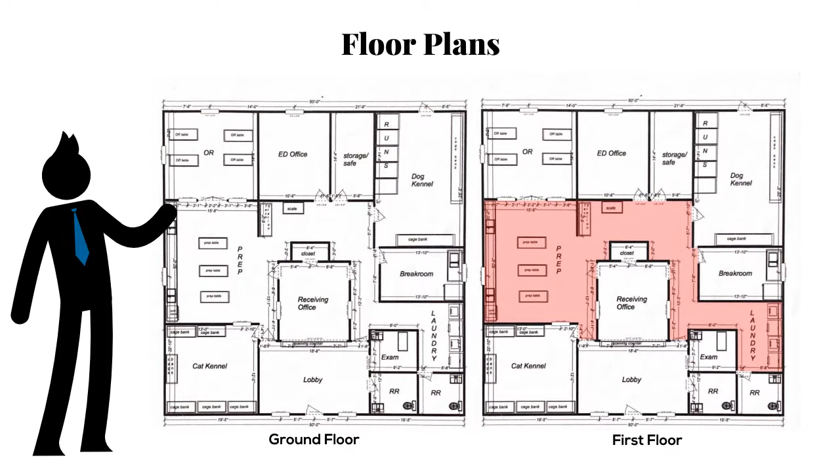Looking at the floor plans, to your left you can see the ground floor, which is similar to the first floor, except that in the first floor we have an opening looking down to the ground floor. I chose two areas for study.

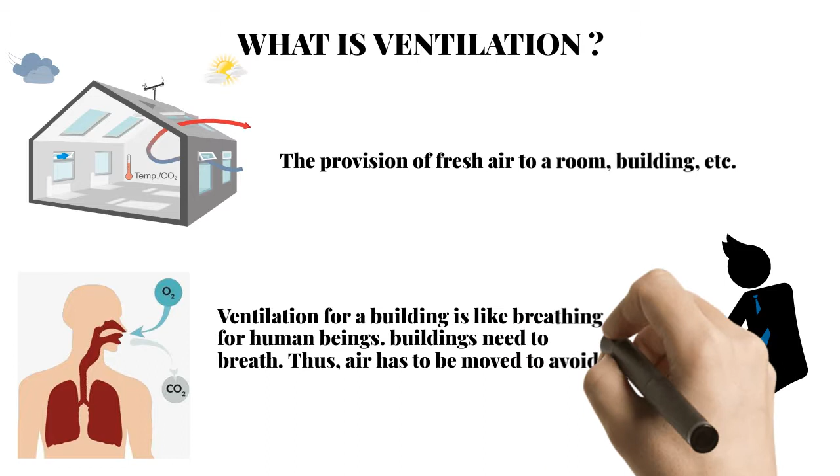But before that, we need to understand what is ventilation. Ventilation in the dictionary means the provision of fresh air to a room, building, etc. But when we're talking about a building, it's just like a human being. It needs to breathe to have a healthy environment.

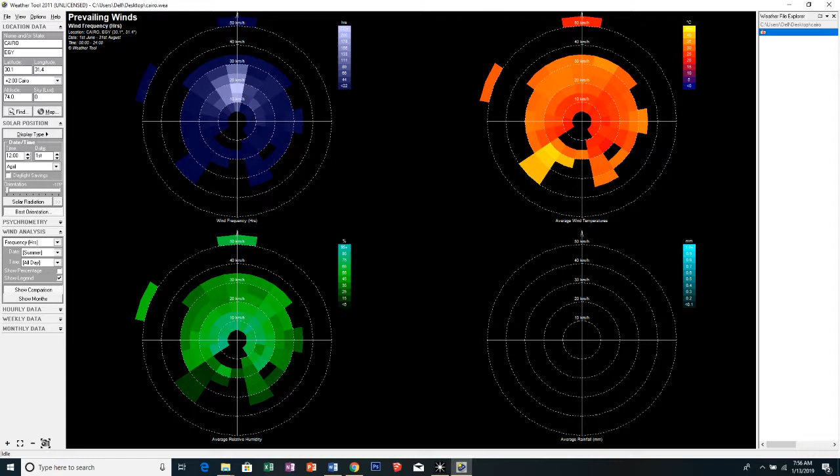First, I had to start with the optimum building orientation. So what is the best orientation for the building to benefit from the ventilation? The Ecotect software gives 185 degrees from the north. These are wind roses from the Ecotect software in summer.

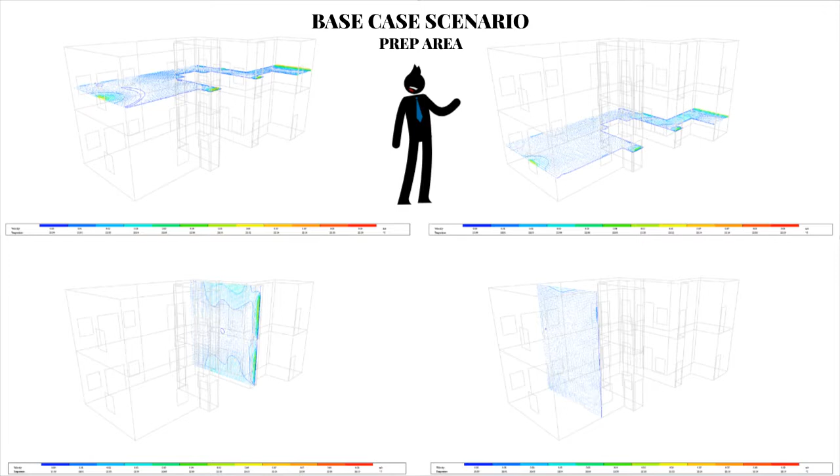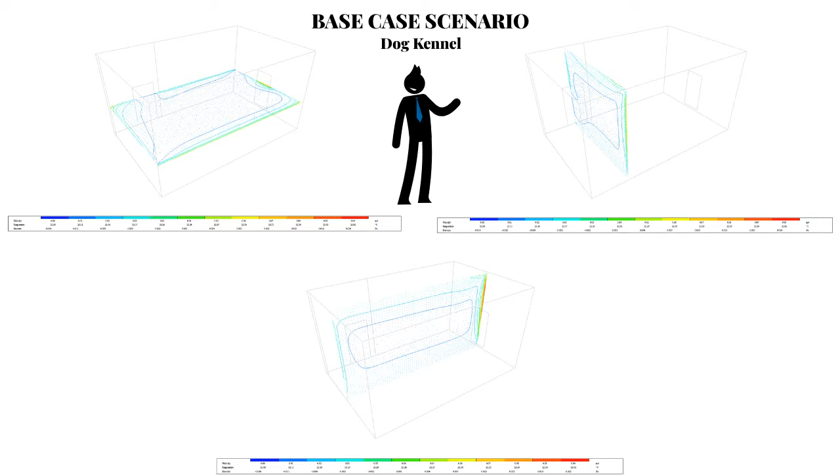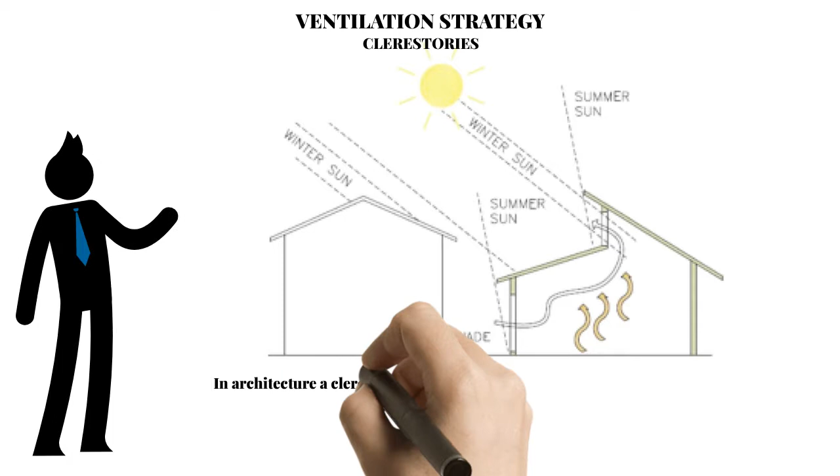Ventilation strategy. I picked clerestories to solve this issue. In architecture, a clerestory is an opening on the top of the wall that allows light or fresh air into the building.

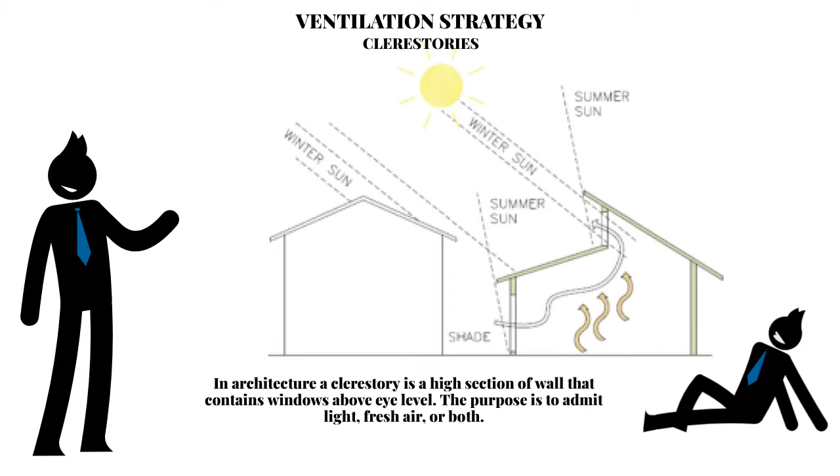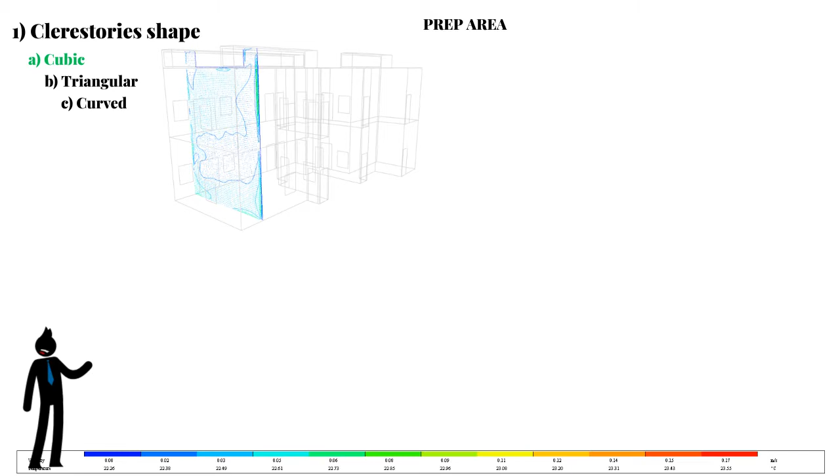First, I chose the clerestory shape. I'm going to use the cubic, triangular, and curved. Looking at the cubic shape, by adding the clerestories to the building, we can see already that the colors are changing from dark blue into a greenish type of shade. That means the air is moving.

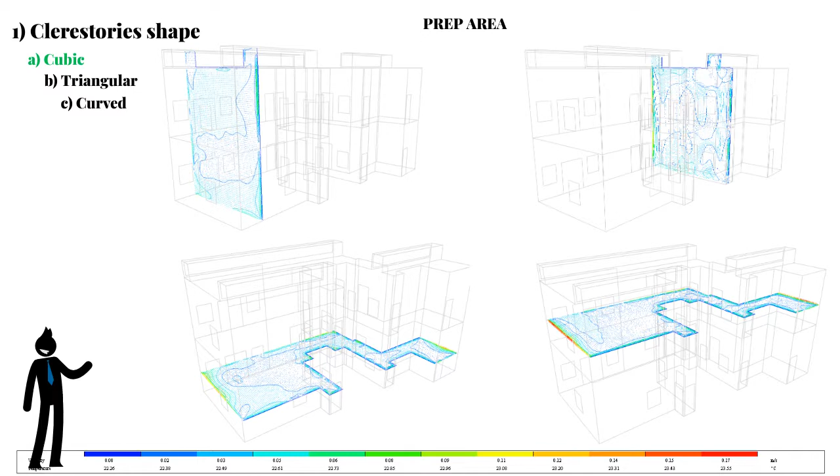The second one is a triangular shape of clerestory. In the same area, which is the prep area, we can see that the green color is there, much better than the previous one, and the air is again moving at a velocity of 0.05.

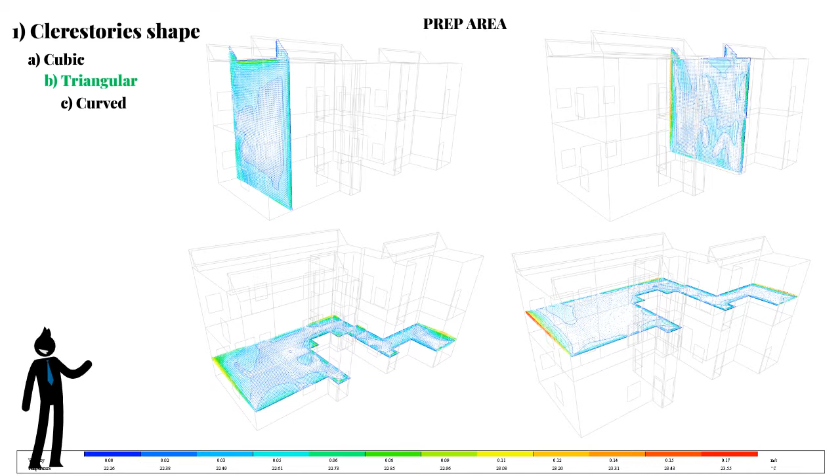Then, when it comes to the curved type of clerestories, the idea is the same. The air is moving much better than the base case, and it is between 0.05 and 0.06 velocity.

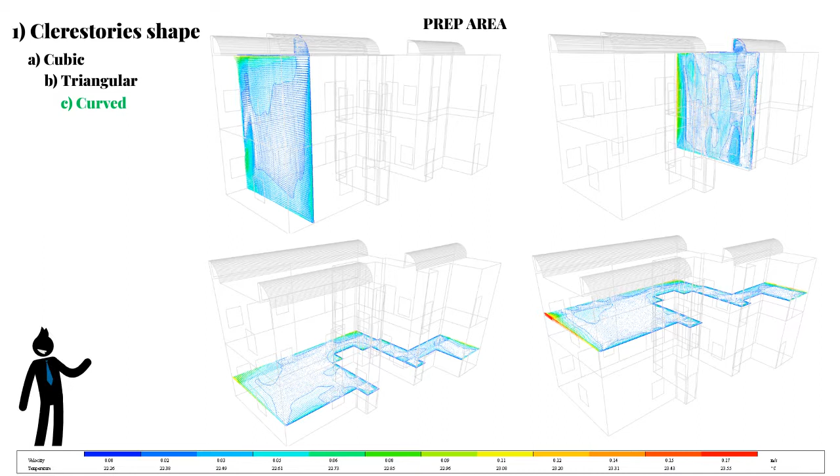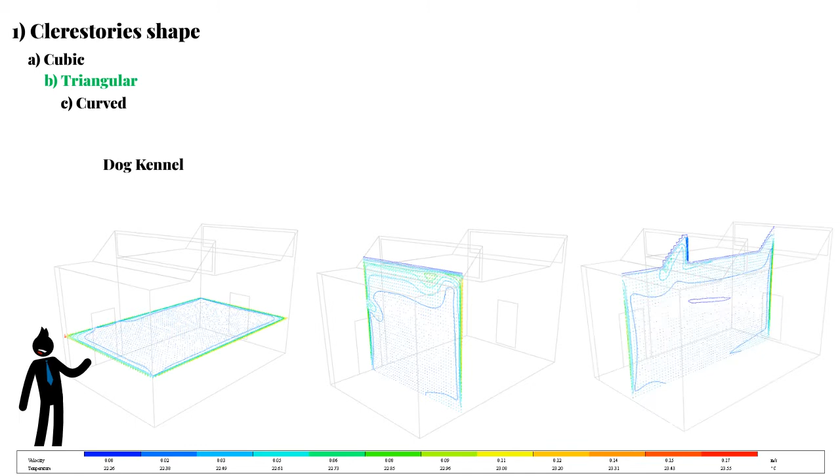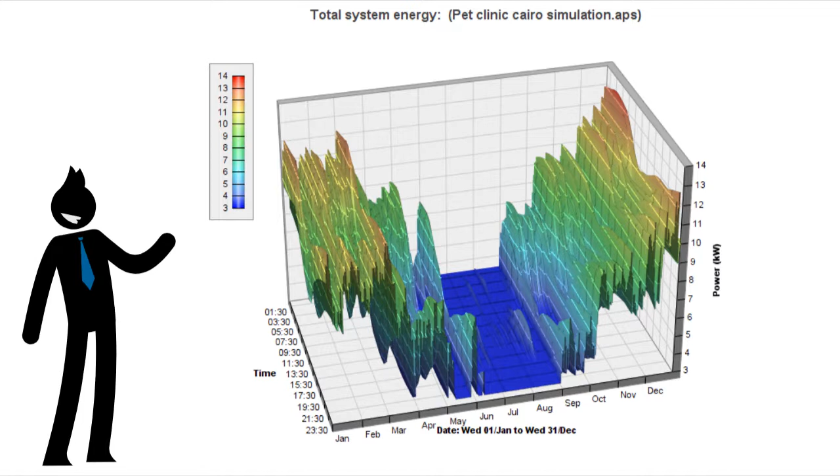Then, same process for the dog kennel again. I used the triangular type of clerestories. This is how it looks in the building, and this is the consumption. You can see that the triangular one is consuming a bit more than the cubic one, which is almost 13.6 kilowatts.

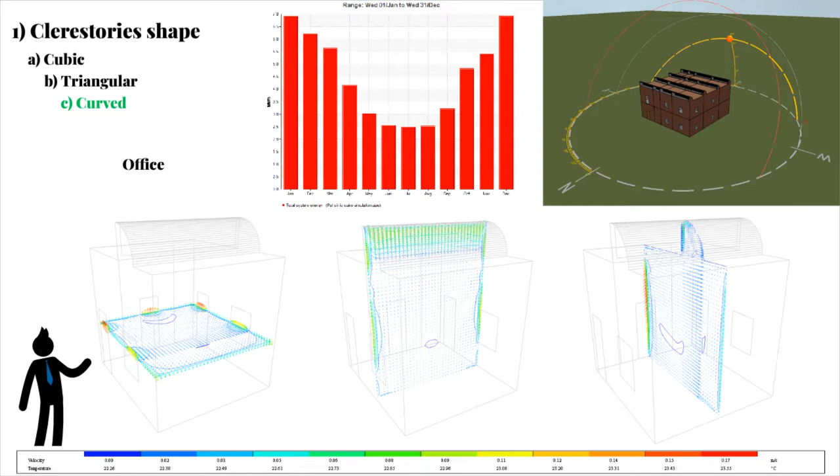And the last option in the clerestory shapes is the curved one, which is an office. And we can see again there is movement of the air. This is how it looks from the outside, and this is the yearly energy consumption. Once again, we can see that the consumption is quite high during the year, which is approximately 13 kilowatts.

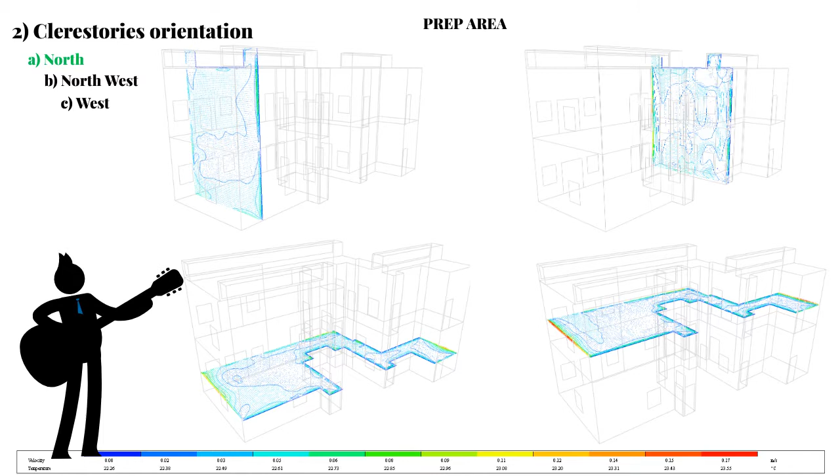The second option I did was the orientation. I oriented the cubic clerestories into the north. From the previous study, we saw that the cubic ones are the ones helping the building more. So I used the cubic ones in different directions. First one was the north, second one is the northwest, and the third one is the west.

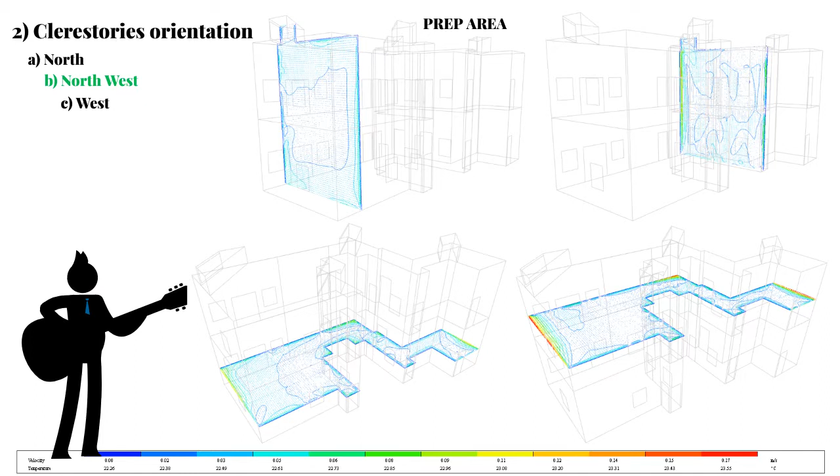The northwest, we can see that there is a better movement of air within the building compared to all other cases so far. And the last one would be the west orientation. So the clerestories are oriented this time to the west, and these are the results of this orientation. You can see that the velocity is 0.06 to 0.08 meters per second.

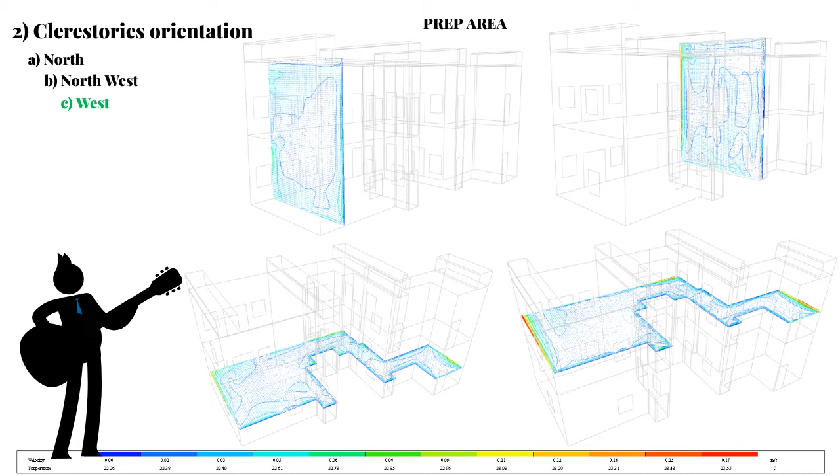When it comes to another space, the same is repeated. So basically, I did the cubic ones on the north, on the northwest, and on the west. We can see that the consumption is 13 kilowatts per year for the north, and then for the northwest,

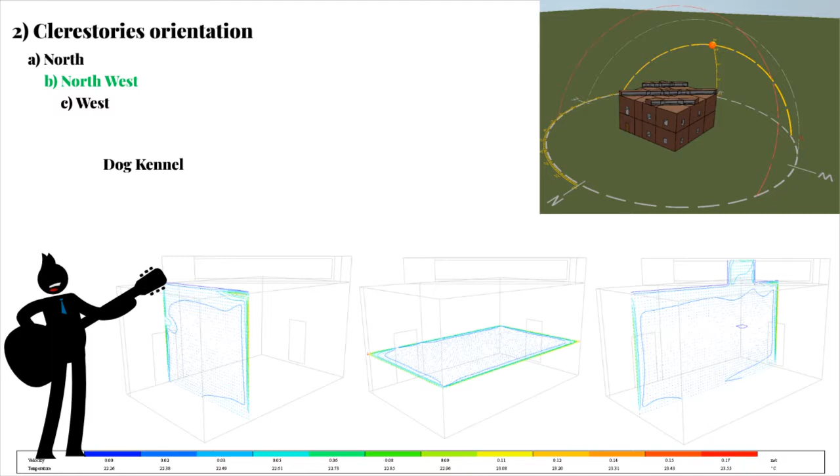when it comes to the dog kennel, we can see that there is not much movement of the air, but still overall, when we look at the consumption of the building, we can understand the building is consuming less energy due to the ventilation happening. So here we can see that there is approximately 12.5 kilowatts for the northwest, and so far it's the best one.

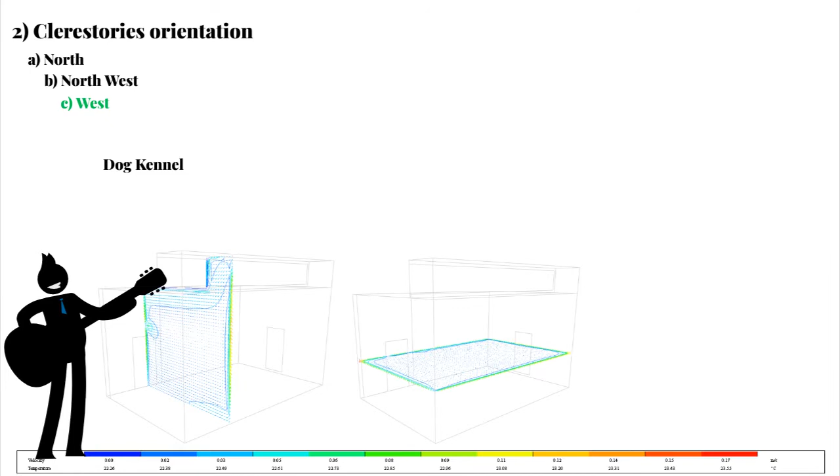Looking at the west, the same is repeated again. The process is the same. We look at the consumption, and we can see that the consumption is higher than the previous one on the northwest, which is approximately almost 14. So far the best one is the cubic shape and the northwest orientation.

Now let's look at the height of these clerestories, using the northwest orientation, the cubic shape, and 1 meter, 2 meters, and 3 meters height. So basically we're just changing the heights. We can see that the results are much better than the previous ones.

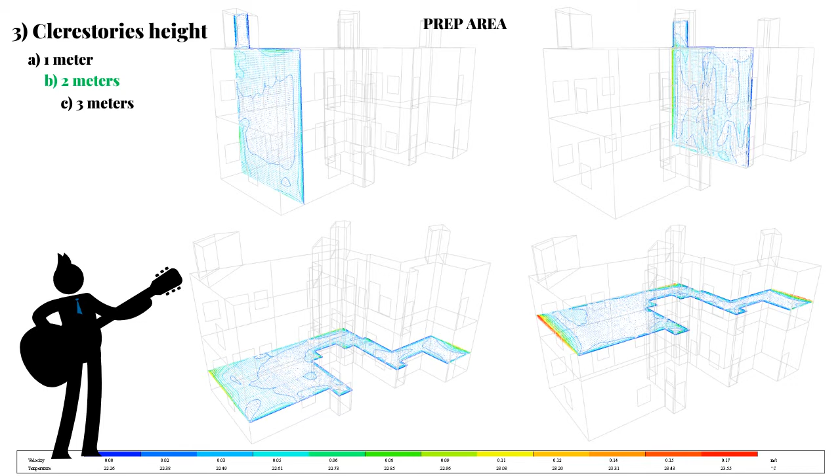The same process is repeated for 2 meters. We can see that the air is moving vertically and horizontally. In the horizontal plane, I chose 1.5 meters and 5.5 meters since the height of the floor is 4 meters, so that we can study the movement of the air at the level of the occupants.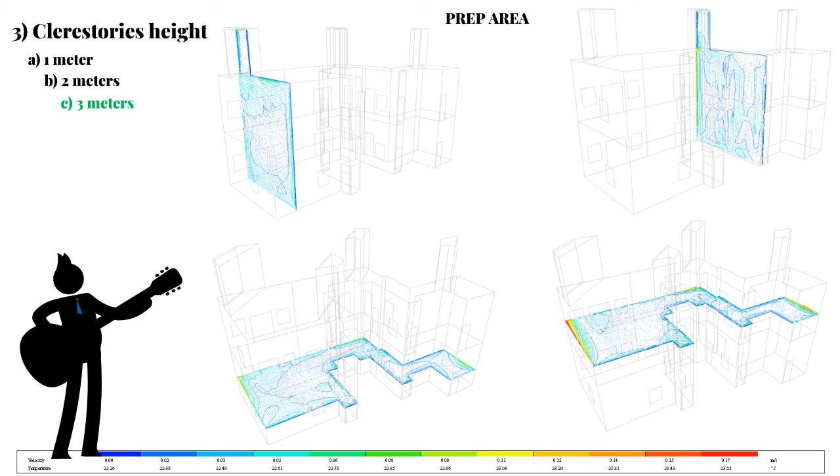The same applied here in the prep area. Down the screen you can see to the left 1.5 meters and to the right 5.5 meters. The air is moving perfectly.

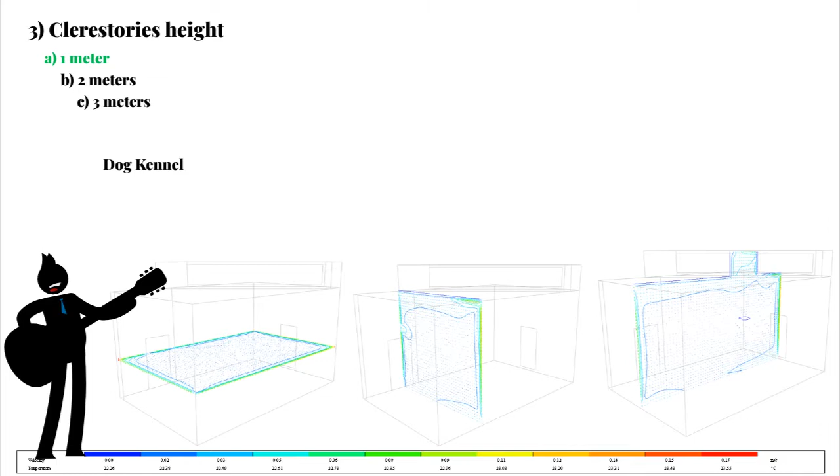Now moving to the dog kennel, we don't see that much of a difference compared to the previous ones, I believe because of its location. It's located on the northeast, and due to the openings as well. So the consumption is low compared to everything we've seen before.

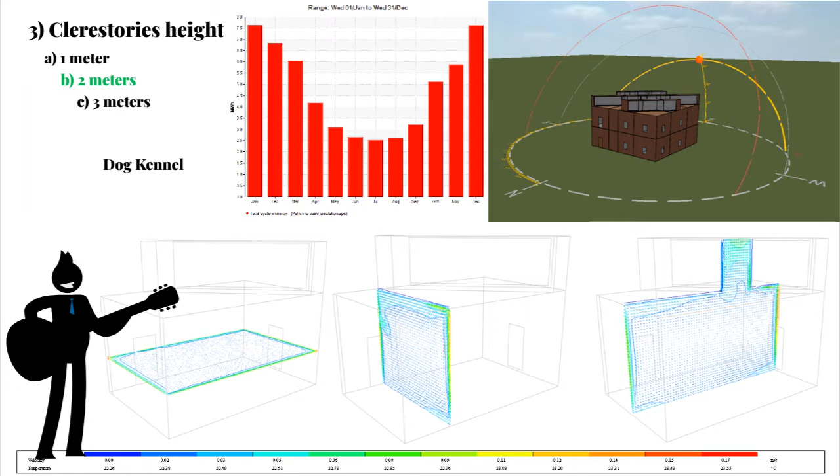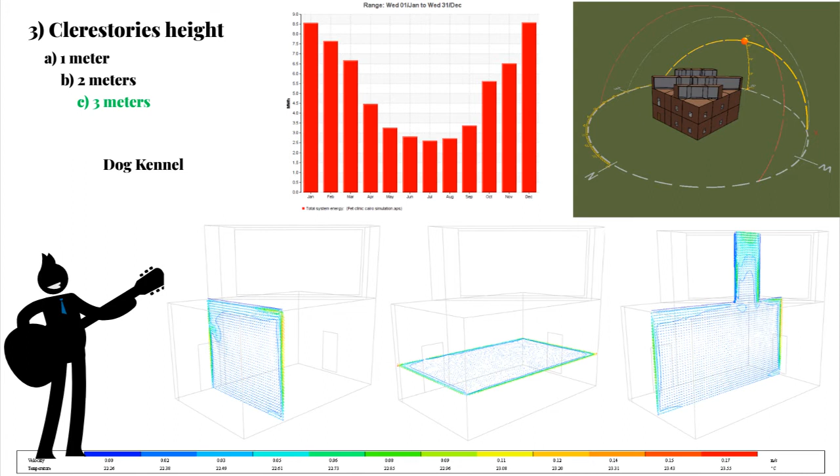And for the 3 meters, again, we're going to see an increase in the consumption, which I believe is due to the increase of the materials that allow solar gain. And the more solar gain you have, the more energy you need to keep the building within the comfort zone.

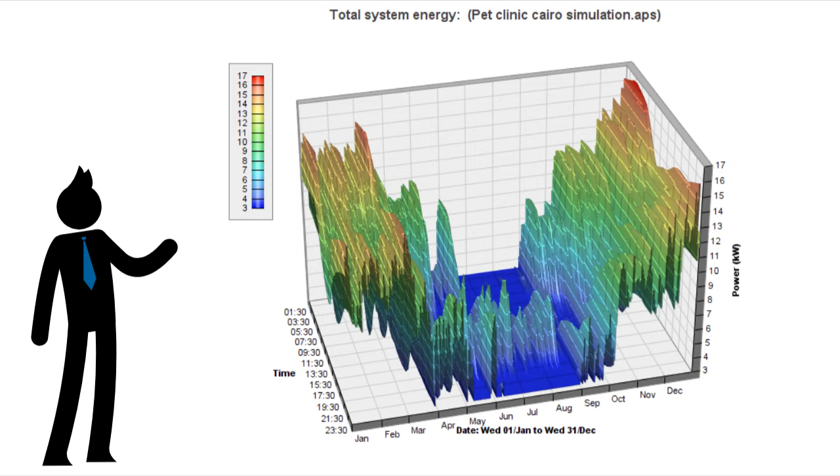As you can see here, once we put it at 3 meters, the consumption is almost 17 kilowatts per year. So the best case scenario in this case is the cubic shape, northwest orientation, and 1 meter height.